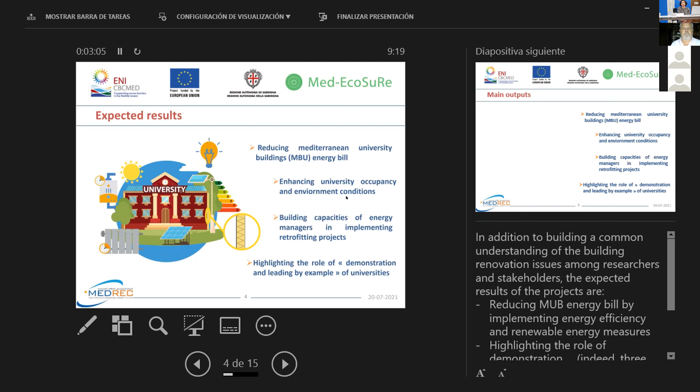In addition to building a common understanding of Mediterranean university building renovation issues, the expected results of the project are: reduced Mediterranean university building energy bills using energy efficiency measures and renewable energy applications; enhancing university occupancy and environment conditions; building capacities of energy managers in implementing retrofitting projects within universities, in particular, and within public buildings in general; and highlighting the role of demonstration and leading by example of universities.

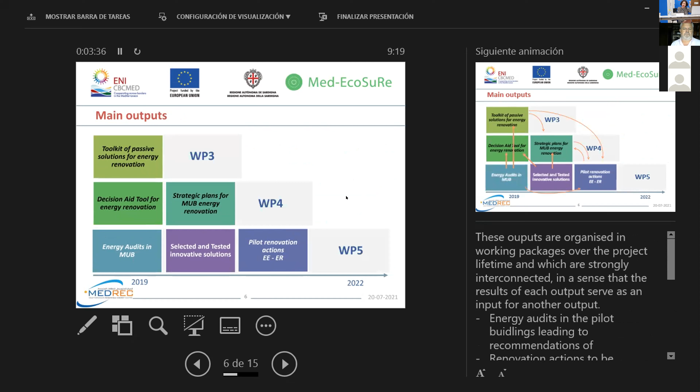So to meet these objectives, the project has identified a set of 6 outputs mainly. These outputs are organized in working packages throughout the project lifetime, and they are strongly interconnected, in the sense that we talk about outputs or realizations, the main realizations of the project, where the results of some outputs serve as inputs in other realizations.

Now, coming to the main achievements of the project so far, we first started by establishing a living lab, which is an intermediation entity for the collaboration between academics, decision makers, and stakeholders, in order to support energy managers on planning and implementing innovative energy measures within university buildings.

So basically, a living lab is a way for university researchers to conduct studies. We have to move to the next slide, sorry.

It's a way for researchers to conduct studies in vivo, based on experimentation and integration of research and innovation in real life situations. The Living Lab is a dynamic space where ideas and solutions are co-created in partnership with key stakeholders in a real world environment.

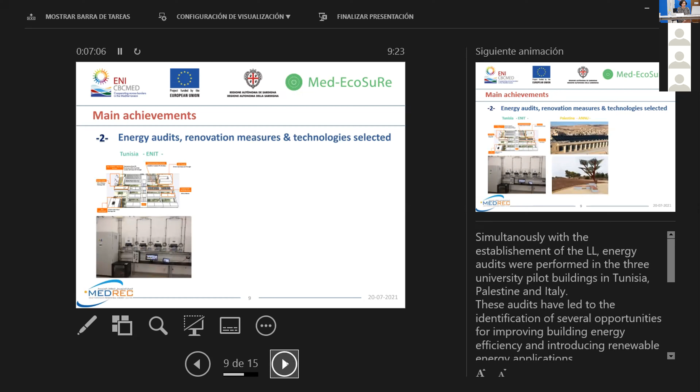Simultaneously with the establishment of the Living Lab, energy audits have been performed in the 3 university pilot sites: in Tunisia, at the National Engineering School of Tunis; in Palestine, at An-Najah National University; and in Italy, at the University of Florence. The audits have led to a set of recommendations and the identification of opportunities for improving the energy performance of university buildings.

Besides, the partners have identified and selected a set of technologies to be implemented in real life, in real environment building universities. The selection process has been supported by companies associated with Solartis.

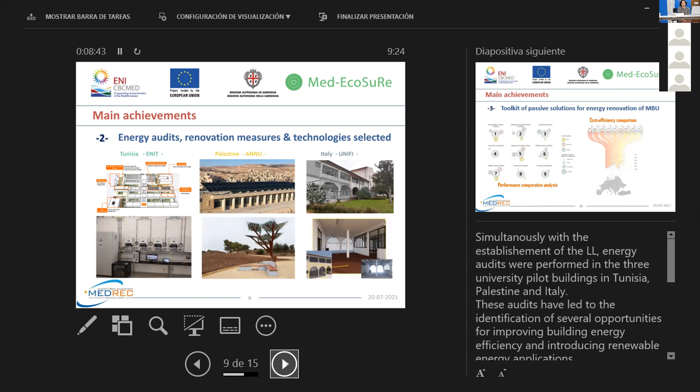One of the tools developed within the project framework is the toolkit of passive solutions designed for energy renovation of Mediterranean university buildings, which is an interactive, bottom-up and participative tool for best practices on energy retrofitting of universities, targeting mainly technicians and energy managers, as well as students as future professionals and decision makers. Professor Antonella will provide more details on this tool.

Another decision support tool is the one developed by the University of Sevilla team. It's a tool that enables energy managers to plan their renovation process within their universities. Professor Molina will later provide more details on this decision aid tool.

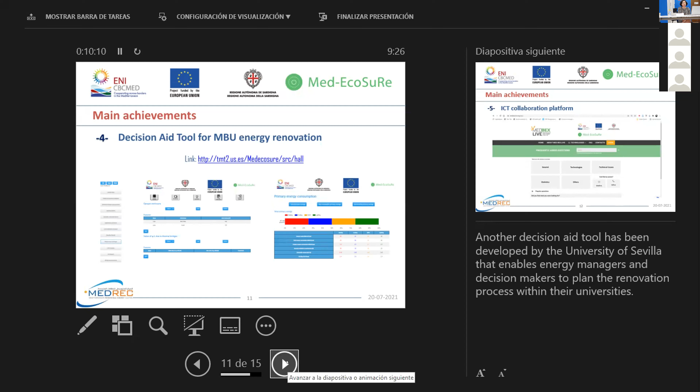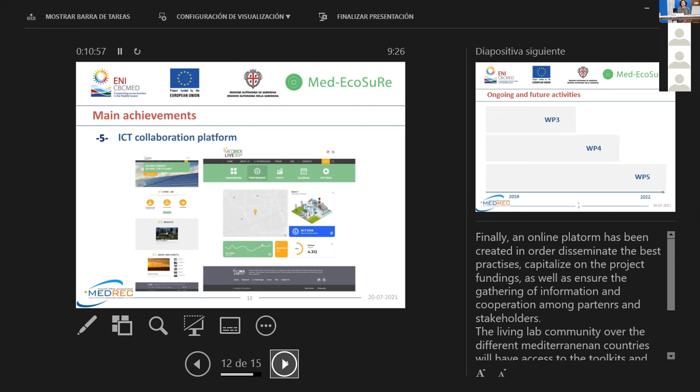And finally, an online platform has been developed in order to disseminate the best practices and capitalize on the project findings, and also to gather information among the partners and in collaboration with the stakeholders. So the Mediterranean stakeholders from different countries will have access to the platform and to the toolkits and different tools that have been and will be developed in the framework of the project, as well as the best practices drawn throughout the renovation process in the pilot sites of Med-EcoSuRe.

As I said previously, we are at the second year of the project lifetime, and so far we have successfully established the Living Lab, developed a set of tools and decision aid tools for energy renovation. We performed the energy audits that led to a set of recommendations on pilot actions to be implemented. We have selected the innovative solutions to be tested, acquired, and then tested in the university pilot sites. During the last year of the project period, we will continue the implementation of the pilot renovation actions, which has already started in the first year of the project.

We are also foreseeing to elaborate a strategic plan for Mediterranean university building energy renovation, so plans to be adapted for each local context, with the overall aim to convince decision makers to adopt the solutions and approaches developed within the project framework.

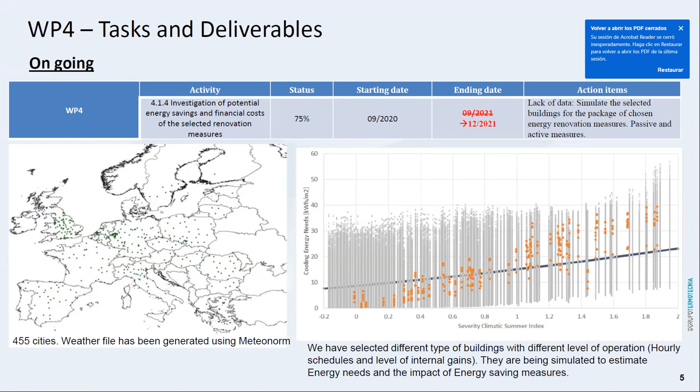This calculation effort is almost three-quarters done and will be finished by the end of the year, as I told you, together with the tool for accessing the results.

The tool will be a simple user interface in which you will be able to select the type of building, the type of climate, the type of energy conservation measure, and see the set of records that have been calculated, just to see the range of energy saving or the range of money saving and so on.

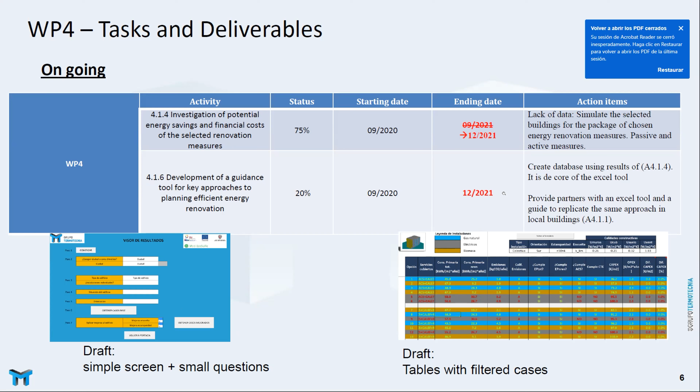The result is more or less an advance. It's not necessarily the final format, but this is taken from an Excel tool now. Everything will be finished more or less by the end of the year, and then the next steps will be a set of training for the stakeholders. Yesterday we were discussing the possibility of making face-to-face training events or webinars, and we have to decide depending on the situation with the pandemic. But we are supposed first to survive, second to be able to travel with this COVID-19 passport or whatever. Well, this is the idea more or less, and now I will start the demo of the tool.

I sent to the coordination on September 15th, 2020, a set of username and password for the partners. Everybody has this username and password, and the server on which the software is running is tmt2.us.es, a server in the university. When you access that, you obtain this web page in which you see the button Med-EcoSuRe. You click the button and you are given access to the simulation engine. Let's finish this, and I will access.

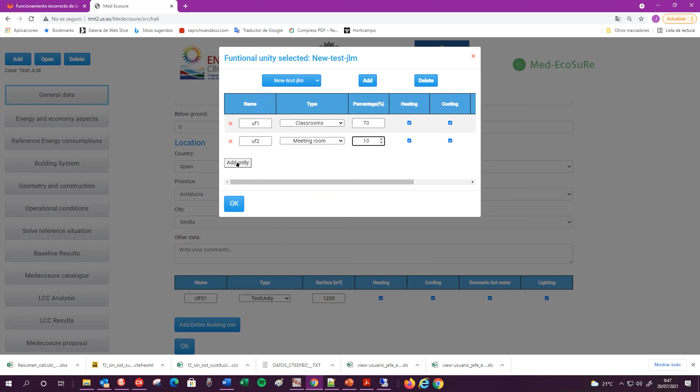When you have finished, you say OK, and going back to the previous screen, you will see the new functional description included in the list. You can select the one you want, and there you have the surface. By the moment, you can only select one user functional definition.

But as you have seen, this is a mixture of different types of activities. It's much simpler for the user to select a single name here, which is divided in different proportions in the building. Well, this is the definition of the general data.

Once you have all introduced, click OK, and the program continuously saves the definition. Then if the connection is broken or whatever, you will not lose your work. Then I will go faster.

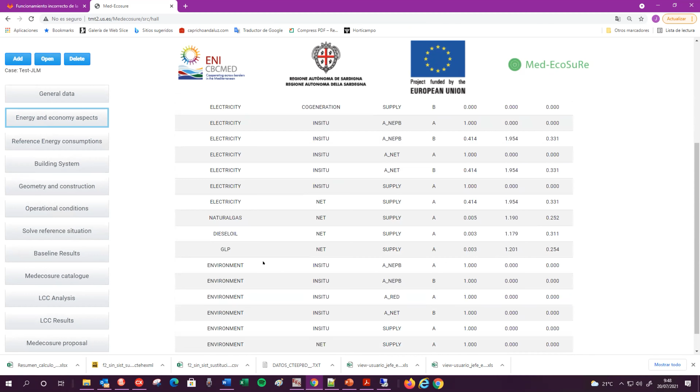The energy and economy aspects is important because you have here a list of energy vectors that can be used in the building, with the pass factors to CO2 emission, primary total energy, primary non-renewable energy, and so on.

And then the economy data, which is defined for the study with the economical study, the typical economic data for the economic study, energy cost, and so on and so on. I suggest that you review all of this and say your opinion in case you miss something.

Well, then the second more important description in the building are the reference energy consumption. Here I have different meters. This is very important. The user has to study the building because they have to introduce the different meters.

For instance, this counter of gas is defined for the energy source natural gas, and the list is the typical energy vectors which is used for heating. And then you have to introduce for the different years that you have been studying in the audit, in the previous existence of the building, you have to introduce the energy consumption.

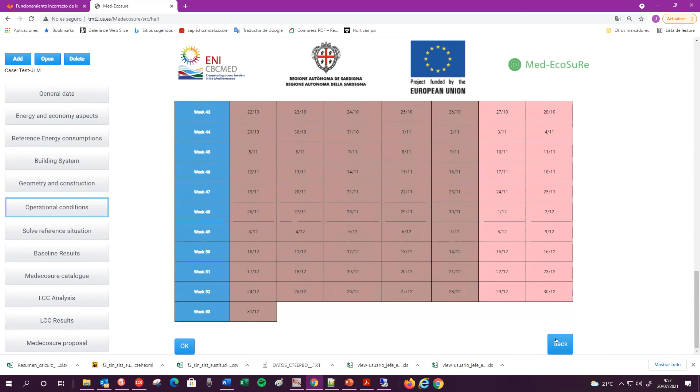Once you have defined all the building in such a way, you go to the reference situation. You see, file generated successfully. This is very interesting because there is another machine in which we have the calculation. Look, this is 9:57. Okay, this is just created, and the calculation engine is working for calculating that.

As soon as it is calculated, you see it disappears, and you see here the results. The results are like that: the data set, the original data set, and all the results. For instance, let me see this file. It's just for you to see, and here are the results for energy needs: heating, cooling, lighting, equipment, and occupancy loads.

Remember this number, which is 105,000 watts, okay, then watt-hours. Then when you go here, you can see the results.

Concerning the raw energy from 1 to the end of the year, for instance, let us see the heating needs. We can see all of them, for instance always this, and say, okay, and you see the hourly values. Just for you to see, you can select a period here. It's difficult, okay. You see this number, 105,000.

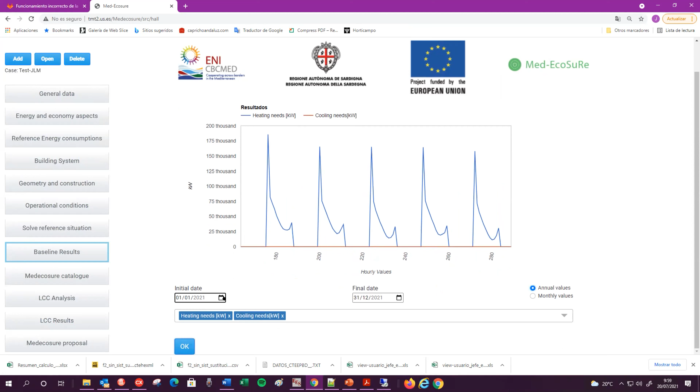Okay, I don't remember how to go back to this representation. You see heating and cooling, and you can mix more data. Well, these are the results in the baseline.

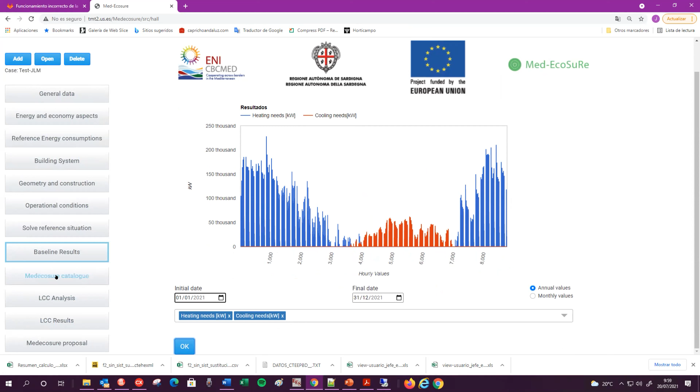Then we have the catalog. Then we can select, but this is very coincident with the Unify work, so it's more or less the same.

Just for you to see the definition of the conservation measure concerning the opaque enclosure. You can select a name for the type of intervention, and then select the component you are going to change. For instance, here I prepare a change in the roof insulation, which would change the initial value of the U transmittance from 0.5 to 0.3, and so on for the rest. You can mix a lot of changes. You can deal with the thermal bridges and so on.

Once you have defined all of these elements, also for windows, the ventilation and infiltration...

Sorry to interrupt you. I think the presentation should be finishing now. We need to present the other toolkit and continue the agenda. No problem, sorry to interrupt you. It's just five minutes more, but I will not continue. Well, thank you very much.

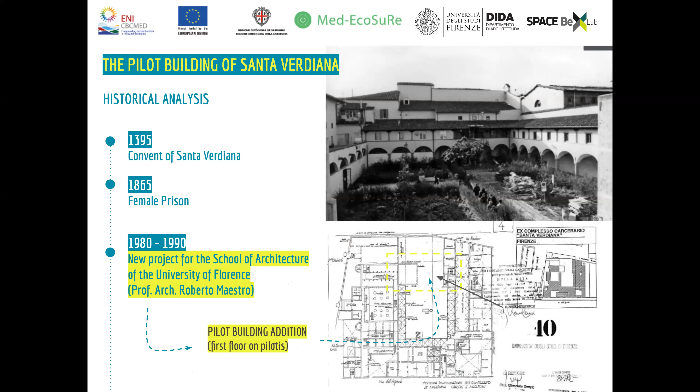So we analyze our building starting from the history. As you know, it was a prison, a convent. So the different functionality changed many times the layout of the building. It's characterized by two different courtyards, and our pilot is concentrated in this part. It is like a bridge from two different parts of the building, separating two different courtyards with a very good exposition. One facade is totally to the north and the other one is totally exposed to the south.

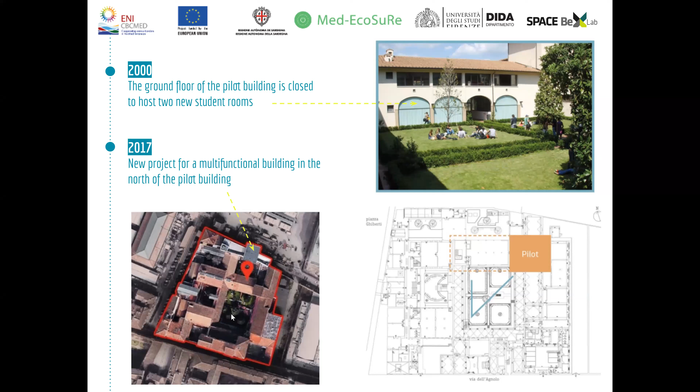Now this wing of the building will become the new entrance of the university space. So it is a very strategic location in order to create a place where it's possible for students, for teachers, and I hope for the citizens to test and experiment a real pilot building where it's possible to see and to have knowledge about the strategies, the technologies. So in order to become itself a training space and a research space, following the real aim of the Living Lab.

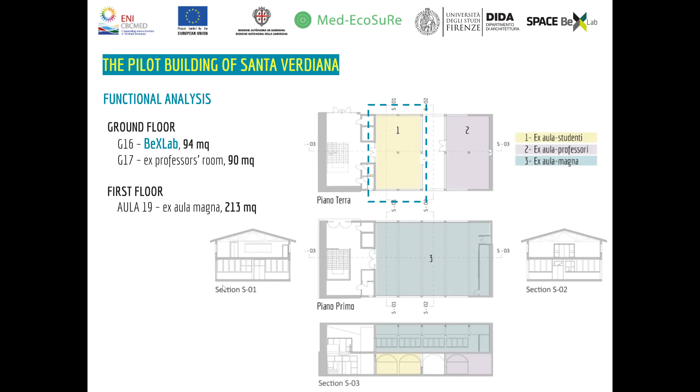Now we closed the first phase. It was the geometrical analysis. It was the creation of a monitoring lab. So we set and we define a protocol, a monitoring protocol, and we organized this space with many instruments and tools to have a complete monitoring of the data about light, about thermal flow, about the occupancy, so to have a very complete framework of the real condition of the space.

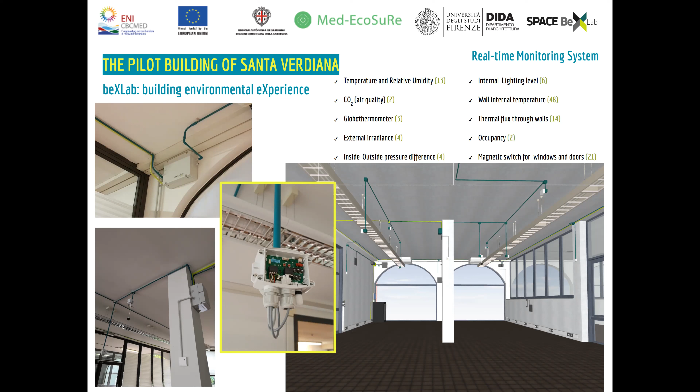In parallel, we develop a digital twin of the space, in order to compare the real monitoring process with the simulation that we can do in a tool.

We are developing the digital twin, implementing it with all the data. Not only the geometrical data, but also the BIM environmental data. So it's possible to enrich the model with all the data.

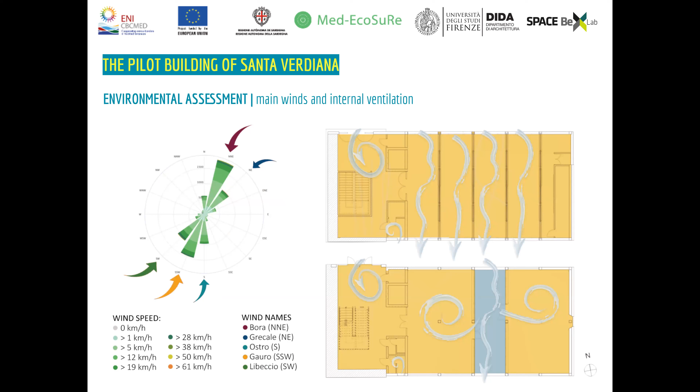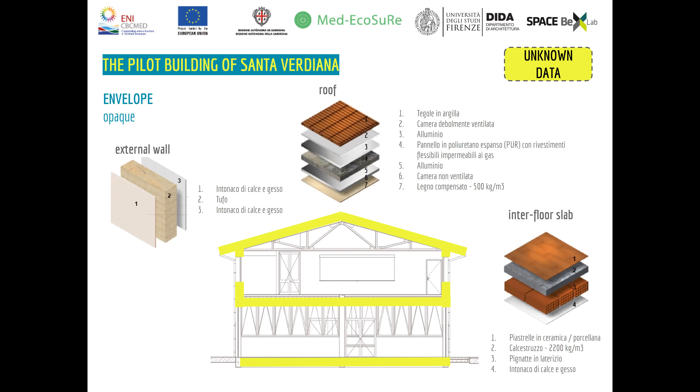Especially about the performance of the envelope and the roof, we are introducing many details about the performance of the wall. This is useful in the second phase where we compare different strategies, materials, and technological solutions to be simulated. So it's the baseline where it's possible to analyze the opaque wall, the window, the fitting, the plant system, the artificial lighting - all the elements that characterize the environmental space and quality, especially indoor comfort.

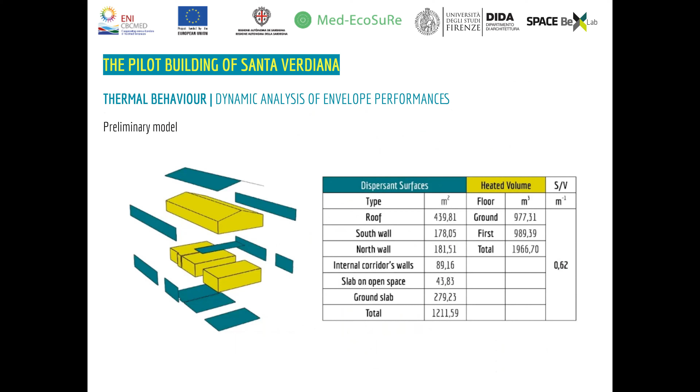Our current work is analyzing in a very deep way all the performance of the element - another research about technical data to enrich the pilot, to enrich the digital twin of the pilot.

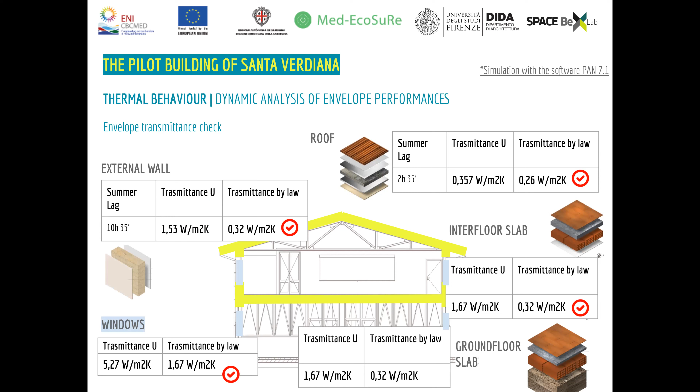We are simulating the real conditions, especially the light factor, in order to test the distribution of light inside and analyze where space is more comfortable than other spaces, especially during the day. So it's not a one-shot simulation, but a dynamic simulation to create a virtual condition of the real space during the whole day, analyzing all the data.

We analyze a portion of time - daily, weekly, or monthly. Many inputs about solar radiation, so the interaction between the external input of solar radiation, the energy, and the temperature inside.

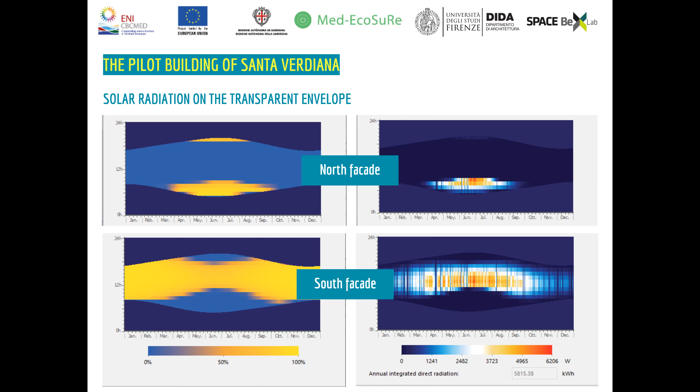We are starting to check and evaluate different apps and software, and we are very pleased to test the toolkit of Professor Molinas as well, in order to compare and analyze which are the main elements and the weight of the different elements in the energy consumption.

We want to push in this direction, to analyze the energy behavior, the different inputs, the different characteristics, in order to check where it's possible to solve the problem in the best way - analyzing the lower aspects in order to create a solution very targeted to our building.

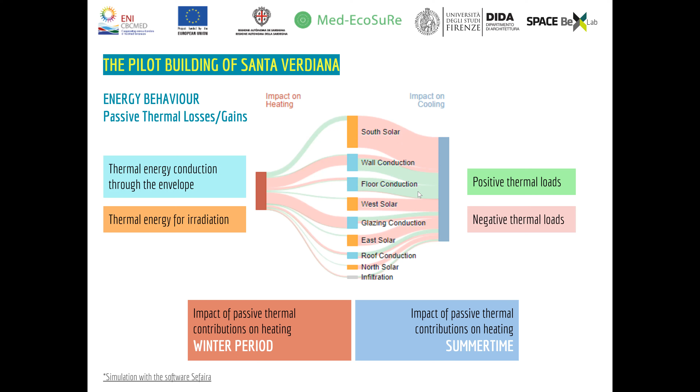We are analyzing the envelope, the thermal energy conduction throughout the envelope, and the thermal energy for irradiation, analyzing which component impacts cooling and which impacts heating, for both the winter period and summertime, comparing with the monitoring data.

The second step is the investigation of different solutions, creating scenarios in order to solve this aspect, implementing a very balanced process. Our aim is to create a real sustainable balance between technology integration, cost, and performance.

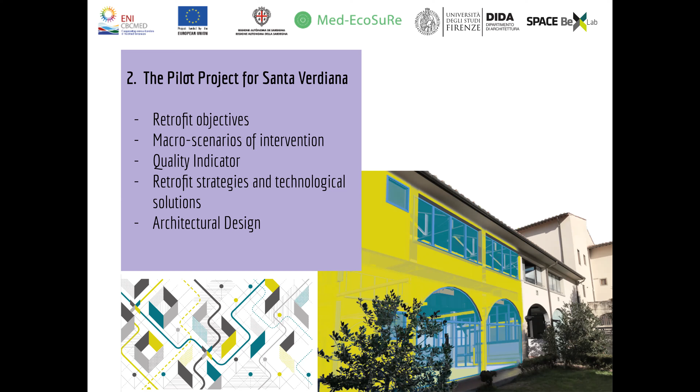We are working on a very strategic building, especially regarding the architectural aspect, so it's not possible to change the envelope or recreate a different architectural aspect of the building. But as a pilot project, we are proposing to our administration different methodologies, especially methodology to obtain a very effective retrofitting solution.

This is the roadmap that we have shared with our administration, starting with the vision of an X-Lab-like experimentation site - a pilot research space for students, teachers, and PhD candidates. Our aim is to implement indoor environmental quality and propose energy efficiency.

But with great attention to the integration in the historical context. This is very important because many university buildings are inside historical buildings in the city center, not only in Florence, but in Italy, and I think around Europe. So this is a key question - how is it possible to mix new technology with the historical context.

Our objective for the pilot project rests on three main pillars: comfort, energy efficiency, and architectural constraint, and we selected different quality indicators. To improve indoor comfort, we are focused on implementing thermal benefits - both the passive and active aspects - as well as natural lighting improvement.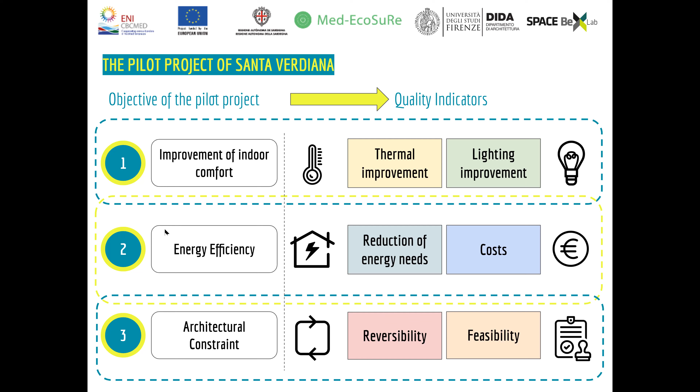We are creating three macro scenarios of the intervention. One is totally represented by the retrofitting of the envelope, so direct intervention on the envelope elements, both opaque and transparent components, by addition or by changing the actual technological solution.

The other scenario we named double skin, creating, especially on the south facade, which is the more problematic aspect, an additional technology to integrate the solar control system, like a shading device, in order to manage the solar radiation in summer as well as in winter, implementing both the passive heat gain in winter and reducing the thermal storage, implementing passive cooling in summer.

The third one is the three-dimensional scenario, creating an external structure in order to preserve the existing situation, especially from the point of view of static and structural aspects. It is an independent solution, but the benefit will be obtained in our building, working in combination with benefits starting from another structure outside the building, working in the very near microclimate condition of the building.

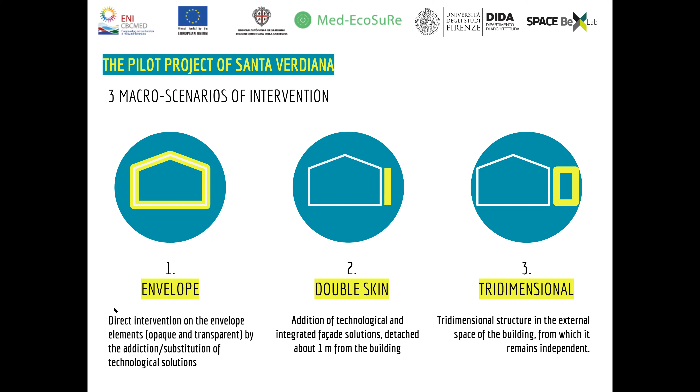Of course we have to manage and balance two different targets: one is to reach a high energy efficiency level, and the other is to reach better integration in the historical context. So we are now exploring the break-even point of this double target to be reached.

In the first macro scenario about the envelope, we are investigating especially three main technologies: thermal insulation of the opaque wall, with emphasis on external insulation or maybe internal—we are evaluating both solutions—fixture substitution, especially smart windows or double glazing, and more high-technological solutions to reduce thermal gain, especially solar radiation control, to manage in different seasons the heat gain coming from solar energy.

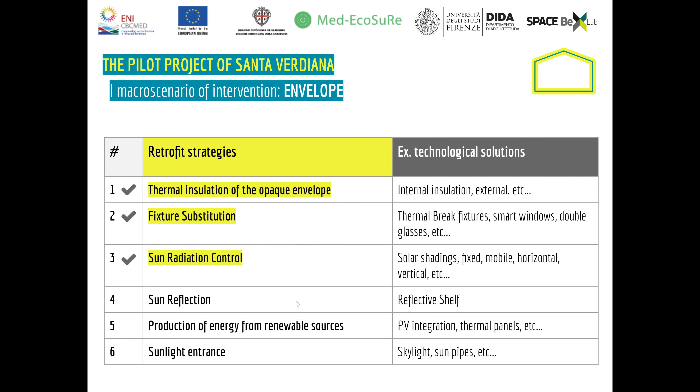We are analyzing the different benefits starting from this kind of solution, comparing the energy reduction but also the feasibility of the structure and the different benefits, especially in implementing wall conduction, since we are working more on the opaque wall and envelope performance.

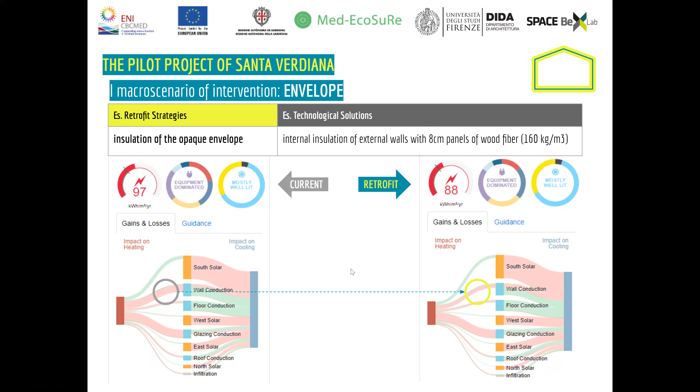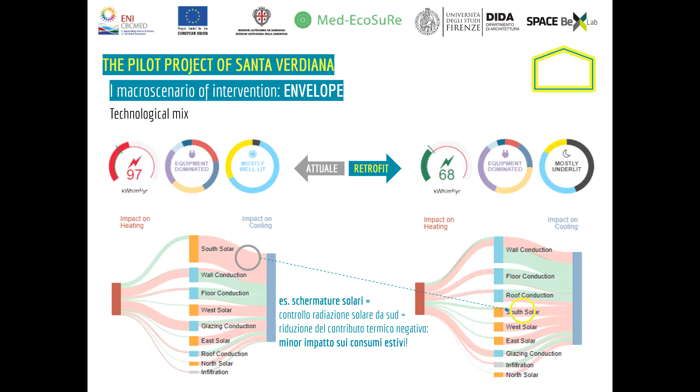We are analyzing the benefits from each technology, trying to determine in percentage how much energy it's possible to reduce with the technological mix in the envelope. So many scenarios, many analyses—let me go faster to show you the architectural solutions.

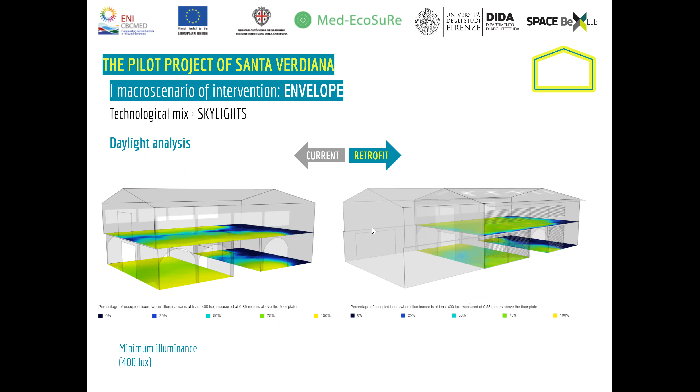The first project is about the skylight. We are investigating the opportunity to create a skylight in the roof, not only to manage the daylighting inside and have a homogeneous distribution of natural daylighting, but also to integrate the fitting within the plan inside the roof. So we are working both with simulation, analysis on the real site, and the digital twin, comparing different mixes.

Many scenarios, many architectural solutions to analyze the concept. For the double skin, we start from a very easy solution: a simple structure outside the building to provide shading, introducing a shading device, and maybe implementing this with photovoltaics, such as double-glass photovoltaic panels, to have both solar control and energy production through the solar radiation, investigating different architectural solutions.

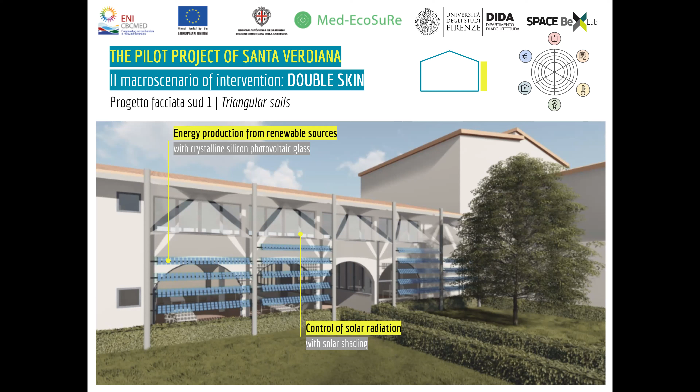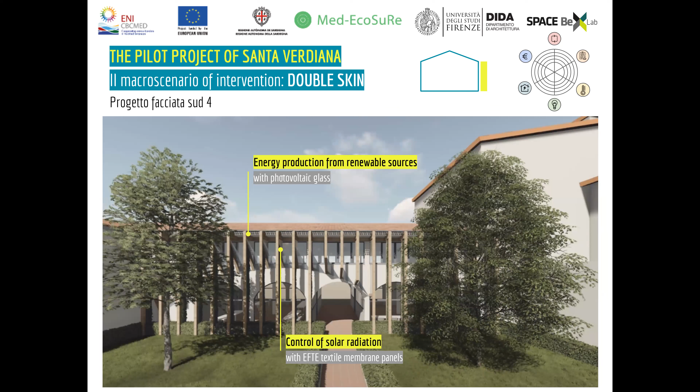We replicate the idea of the portico, replicating the distribution typology of Florence buildings in the new structure. So many architectural concepts with different materials and different feasibility levels, investigating the mix of material performance—the use of steel, the use of wood—and how each material could contribute to a similar architectural scenario, implementing comfort inside.

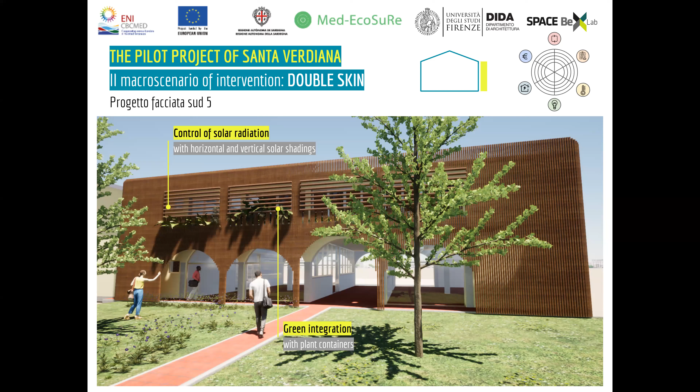Based on the similar architectural layout, we change the performance of material, the color of material, the capacity to transmit heat, and of course the way it replaces daylight inside.

Many simulations. Another point is the opportunity to investigate a green integration, especially with plant containers, using plants as a new natural-based technology to implement comfort inside. So the idea is to create a new facade, like an external extension of this research laboratory, experimenting with different sections and technologies to monitor and test different solutions.

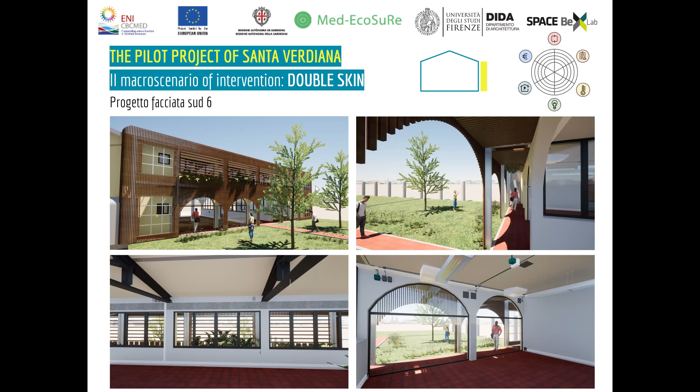Another one, more attractive and more design-focused, centers on the horizontal shading device, analyzing the effect of lighting, especially on the first floor, because it's very dark—analyzing the reflection, the tilt of the solar radiation, and the reflection inside.

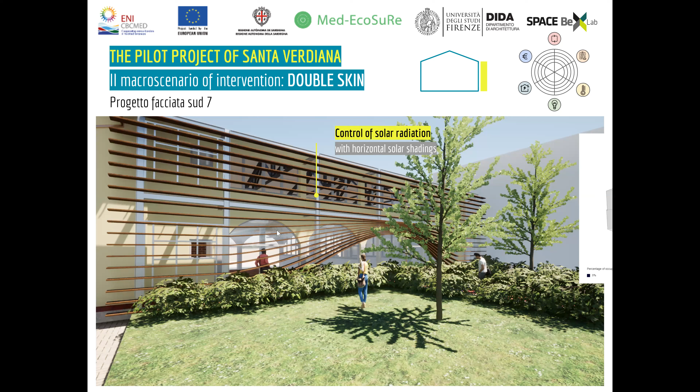So as you can see, we work both with external view and the internal simulation of the internal space to control everything. The last one is a 3D, creating a new external space, maybe useful for students to spend their time outside the building, because there is another need to extend this space outside. Combining both the integration of energy production, the integration of greenery inside, and

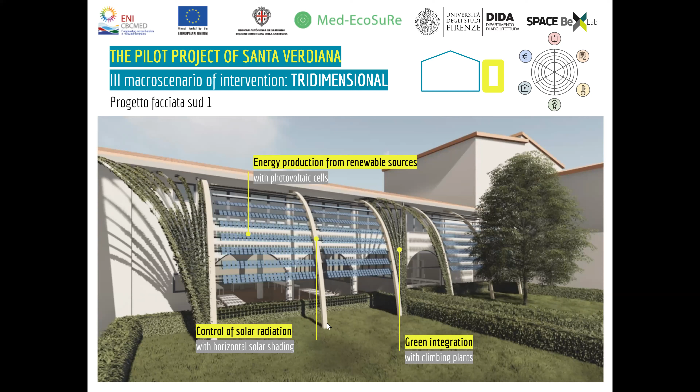a structure combining the architectural aspect of the old portico. Different versions of this idea of external structure, experimenting with different materials, different solutions. Some solutions about perforated steel elements, as well as different textures or aluminum or other elements, or maybe combining the green integration with climbing plants.

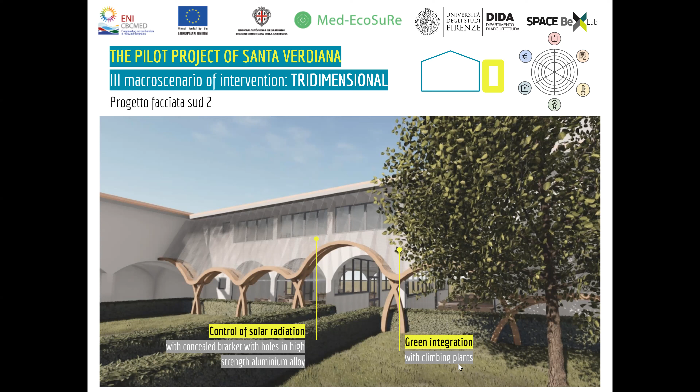So another one is a different concept, an outstanding, self-standing structure outside the building, like a tree, like vegetation outside, to create a microclimate, a new microclimate. This is the last scenario, analyzing how it's possible to solve the problem inside the building by working outside. So it is a borderline solution, but I think it's very useful to investigate this other aspect, especially in existing buildings, especially where it's possible to have a garden outside or more space outside.

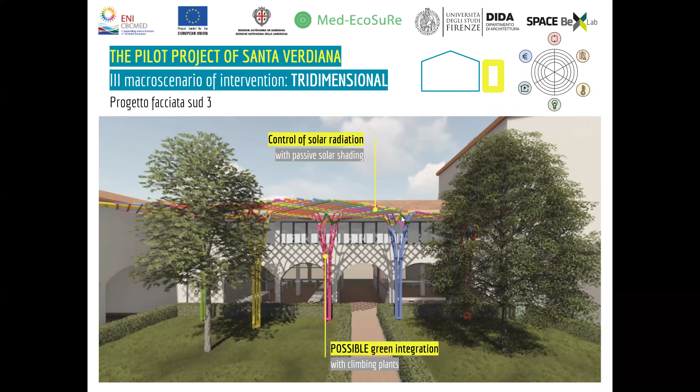So in this structure it's possible as well to integrate not only shading devices for solar radiation, but maybe it's possible to integrate plants as well as PV panels. And this kind of structure we analyzed to develop into another concept, like a 3D structure, maybe integrating much more plants, much more greenery, and transforming the garden into a pergola, implementing the outside space, combining the microclimate.

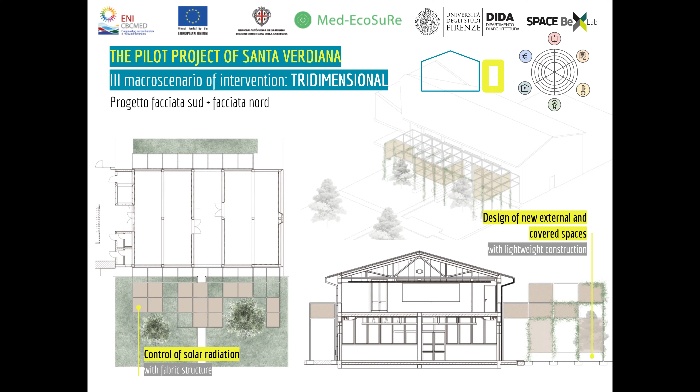Sorry to interrupt you, you should be ending the presentation shortly. Yes, I'm finished, and this is the last slide.

Just to explain, our work is ongoing, it's a process, and now after all the evaluation, we are analyzing and evaluating which is the more suitable solution. So thank you very much.

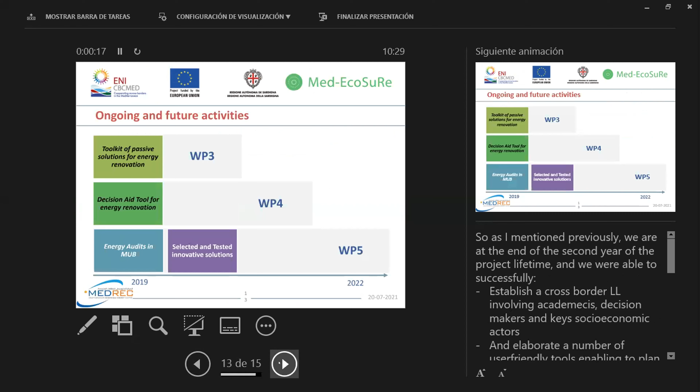Before starting presenting the training program, I would really like to thank all the project partners and stakeholders we have been involving, including the companies present with us today. Thanks to this collaboration, we have been selected as one of the few success cases within not only the ENI CBC MED program, but also within the ENI-CBC, the European Neighborhood Instrument cross-border cooperation. This has been shown through the positive evaluation of our progress and intermediate reports, where we obtained the highest marks, and also by being featured in a thematic publication on environment, published by the ENICBC program as a project targeting climate mitigation and adaptation in the Mediterranean region. So we are really, really proud of this achievement, because we have been working on a very promising, ambitious, and also challenging project.

And when I say challenging, part of it is due to the pandemic, but also because we are dealing with public universities, and in some cases historical universities. We know it is not very easy to deal with this type of university and to plan and implement innovation actions. So yes, it has been very challenging, but thanks to a very highly qualified consortium and stakeholders actively involved in the project, we have come this far. I hope we continue to work with the same enthusiasm in order to reach our final goal, which is to provide decision makers in the Mediterranean with action plans enabling them to plan the energy renovation of their university buildings, which can also be extended to public buildings.

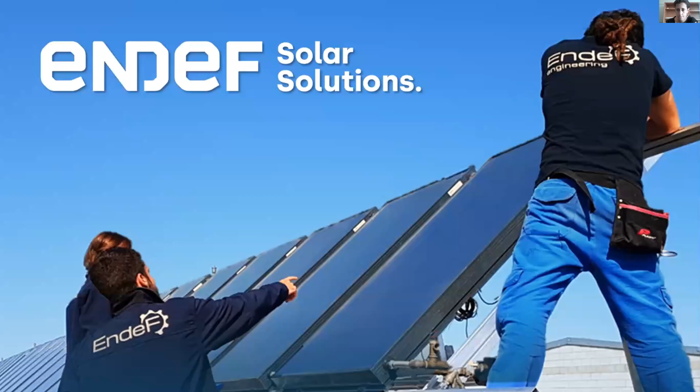Good morning, I'm Isabel, the CEO and co-founder of Endef Solar Solutions. We are a small company located in Zaragoza. We were founded in 2012, and our mission is to make the independence of the people possible thanks to the sun. We are a very small company, but with a high level of innovation. In fact, we have several PhDs in our company, which is not quite common in other small companies. And we work very hard on doing innovation and moving this innovation into the market.

We have 5 different areas: a research area, an engineering area, the manufacturing area, the installation, and the monitoring. So that way, we are working in different areas, and we are able to have information from the field about what is happening, and also continue improving always.

Now I'm going to present the solutions that we have presented in this project. In our world, we have a problem: our buildings and houses have high consumption, and we are not able to produce all the energy that we need with solar or PV panels, because the efficiency is low, or quite good—we can see like 20% efficiency, but it's not high enough to cover all the consumption we have in our buildings. We can see the consumption of our buildings in Europe is quite high. Also, the heating and cooling part is a critical consumption that is difficult to cover with solar energy. For that reason, Endef in 2012 developed hybrid solutions that produce heat and electricity in a single panel, and that way we can reduce the area needed to produce more energy in our houses.

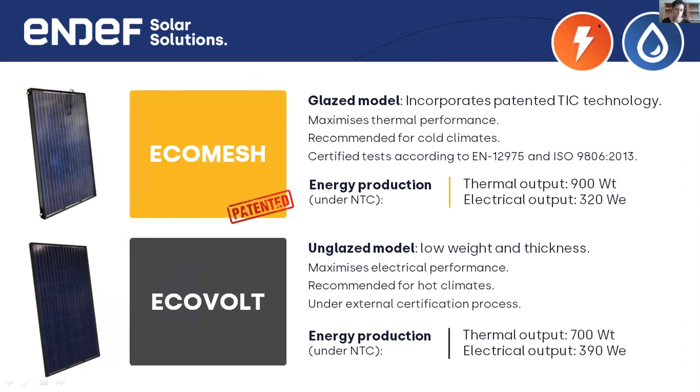So we have 2 models with water. One is patented and another one is not. One is a glazed model that produces more heat and not too much electricity, and another model is an EcoVolt, an unglazed model that produces more electricity and less heat. So depending on the energy that you need, you can use one or the other. And for this project, we have presented a new hybrid solar panel that we are developing, called EcoAir. In this case, we don't use water as fluid, we use air, and we try to produce electricity and heat, but for heating, not for water—that's the main difference.

Here you can see that we take the sun. We can produce around 20% electricity, and the rest, the PV panel is going to liberate as heat. So we try to recover part of this heat with air and use it for heating. And this is our panel. This one is also patented, because we have designed a symmetric absorber that is located in the back part.

And with this panel, we can use it in winter for electricity, space heating, also ventilation and purification of the air, and in summer to cool down the ambient during the night. And also, of course, electricity, ventilation, and purification.

And this is how it works. We put several EcoAir panels together, and we just need a ventilation box where the fan is located. We can introduce the air into the building if we need it, or evacuate it if we don't, for example in summer when we don't need more heat inside.

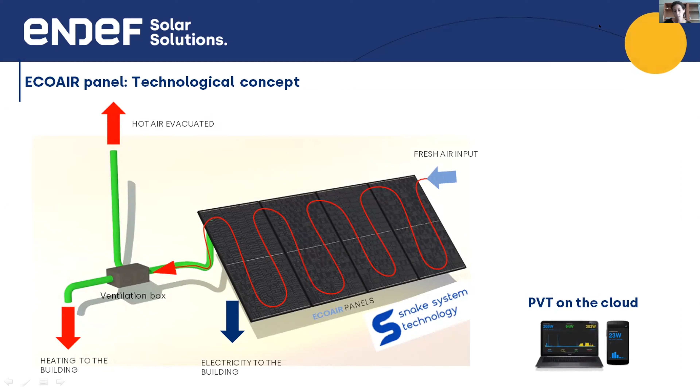We also have this all on the cloud, so you can see how the installation is working, and also change the configuration if you need it. These are the main parameters of our solution.

We can achieve temperatures up to 55 degrees. The thermal power is around 680 watts. And the electrical power is quite good, at 400 watts.

It's the first PVT that is based on half-cell PV module. So we are using air as fluid, but we are also using a PV technology that the PVT market has not used until now.

We also have some advantages if we take into consideration the mounting system. We can install in new and existing buildings, and we can use flat and sloping rooftops. It's very scalable, like PV panels, for large or small installations.

You can see here how it's working, like in winter, as I mentioned, to produce electricity, heat generation, and ventilation. In summer, we can evacuate the air and use it for cooling during the night if we want. So the main advantages of this panel are that we can achieve high temperature with air, which is not very usual.

We can install in new and existing buildings, and the payback is very low. Right now we have one demo with 5 EcoAir panels in offices, and here we can see the first results.

This installation started working in April, so we don't need heating every day. For that reason, on some days we can see the PV generation, that's the red line, and the blue only when we need heating.

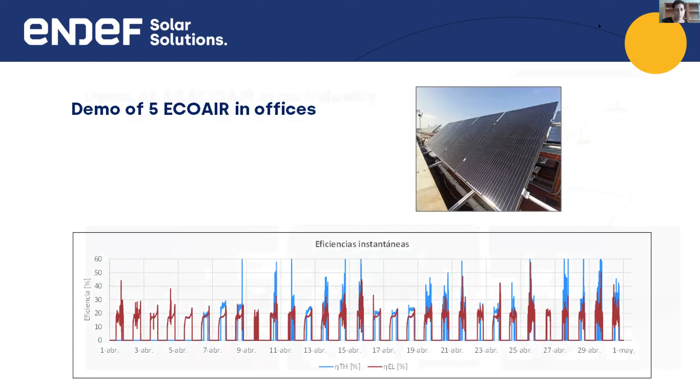And now we are carrying out another demo in an industry with 80 EcoAir panels, which we will use to heat the work space of people who right now don't have a heating system there. So this winter we will see the first results of this installation.

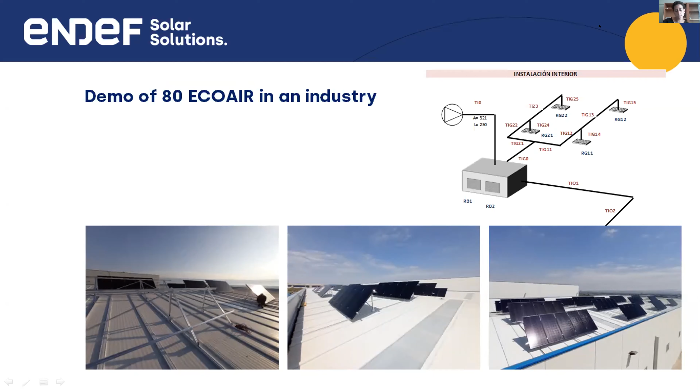And this is everything. If you have any questions, I will be happy to answer.

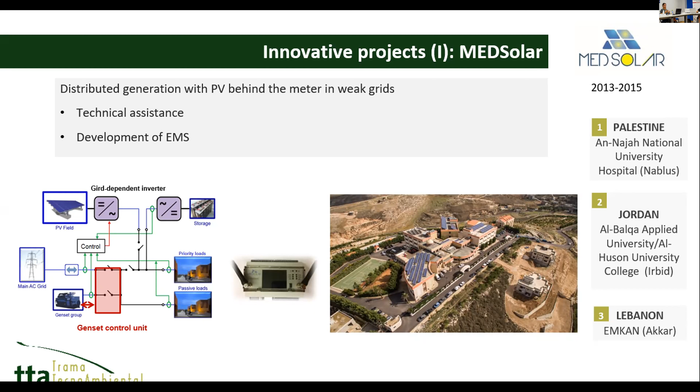So the first pilot was at An-Najah National University Hospital. It comprised a PV plant of 140 kilowatts, which was previously installed with the Med-EcoSuRe project. The actual functionality of this PV plant was to provide peak shaving. So the energy controller was able to provide peak shaving when there was grid, and when there were blackouts, the PV was used for fuel reduction as a fuel-saving means.

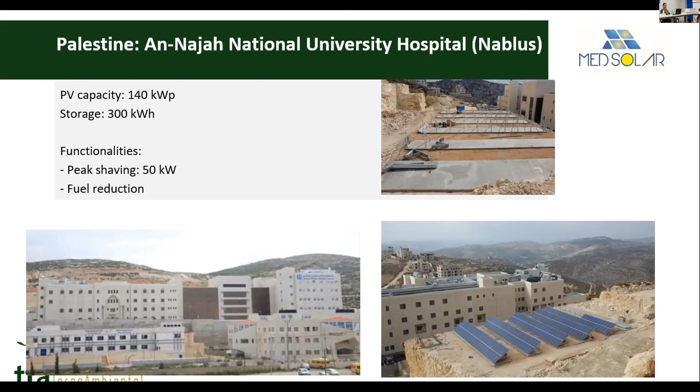Then in Lebanon, we installed PV on a market, the EMKAN market. In this case, the PV was used to electrify, as a UPS, uninterruptible power supply, some critical loads like cold storage, and also do fuel reduction and also net metering, which in Lebanon at that point was permitted when the grid was present.

The third pilot was in Jordan, in another university building. It comprised a plant of 80 kilowatts, and the functionality there was also to do peak shaving when the grid was available, or fuel reduction when the university was run by the diesel gensets. On all those three plants, they also had storage to complement the PV generator.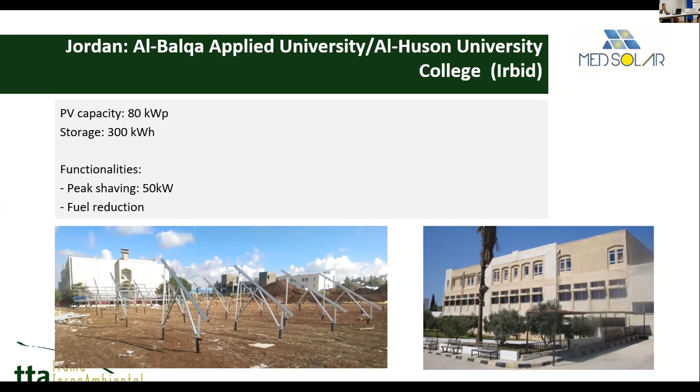So the other innovative project to present, which was actually what was filled in the form by us, is a different concept. This is a PV integrated in an autonomous building. This solution was already proven after being installed in 15 clinics in Ghana, in a project funded by USAID. So that was not to support the grid or do energy efficiency, but actually to electrify the building, a standalone PV plant.

So we designed a kit of a PV array of 3.5 kilowatts on the rooftops of the institutions, of the clinics. They were 100% solar, they didn't have any backup. So the innovation here was actually to share the limited amount of energy among the different users. The clinics actually did not only have the clinic, but also the houses of the staff, of the doctors and the nurses.

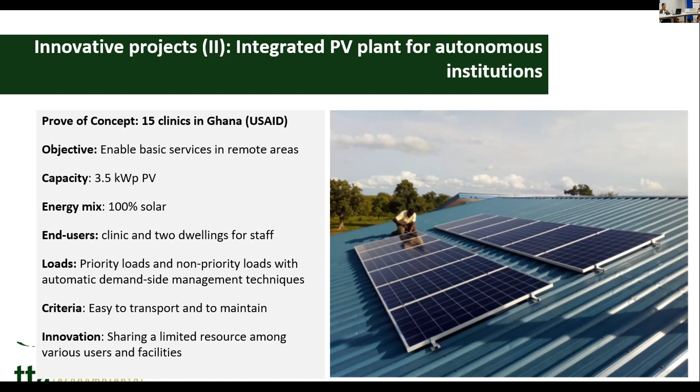So through adding some smart meters, actually advanced meters, we managed to split the energy among the different users equally, according to their actual needs. The most important criteria of this installation, since it was in very remote locations in Ghana, was to be very easy to transport and to maintain. So we ended up with this solution.

But actually required very little or no maintenance. We put non-spillable lead acid batteries, closed and sealed ones, so no maintenance needed for the batteries, just some cleaning of the PV modules. So this kit provides energy of between 8 and 11 kilowatt hours each day, and it has also a storage component of 31 kilowatt hours.

And in terms of operational aspects, sharing energy is possible through those meters you can see in the top picture. This meter is called an electricity dispenser, and each end user had one installed and configured already for the energy limitation, the daily energy limitation.

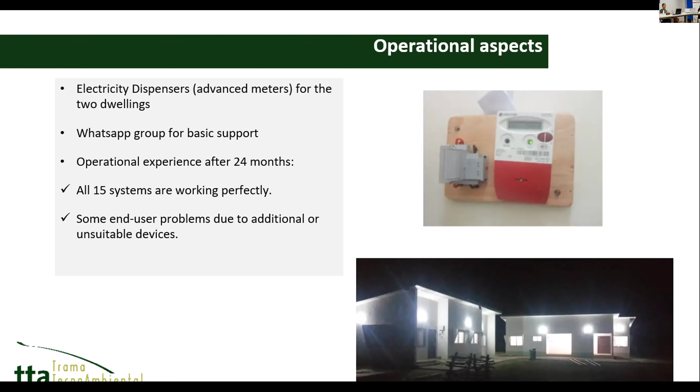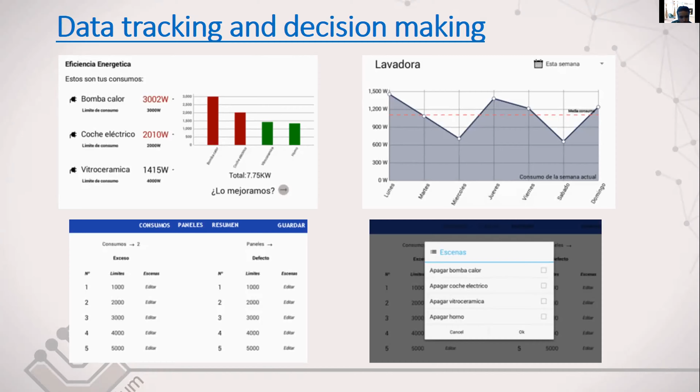Now in the company we are going one step further and starting with the smart city project. These are projects where we take all the knowledge we have from buildings and develop these functions not just for one building, but for the whole city.

We take data from all the buildings and manage the street lights and their consumption. With all this information, we send orders to the different devices installed in the buildings and in the city, saving energy not just in one building, but for the whole city.

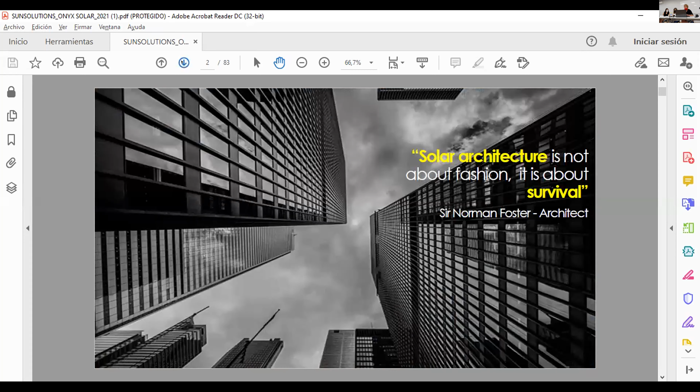With this technology, photovoltaic glass, you can have a solar generator system in your building, and you can switch this special glass to the needs of the building. You can use it in the wall, as a curtain to separate spaces, as a roof, or as a floor.

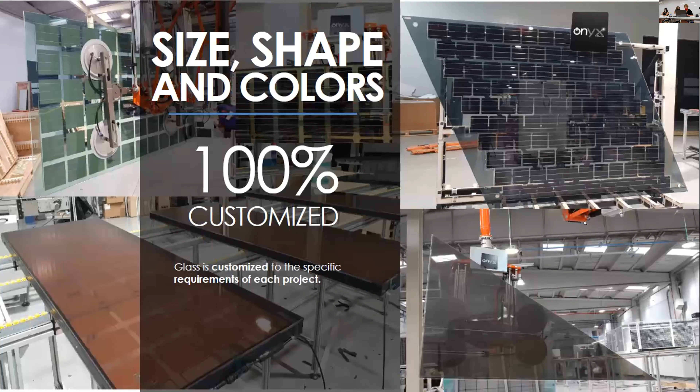You can use it in the way you need in your building, so you only need to study your needs of consumption, or detect what is the focus you want to use this glass for, to produce energy, or to avoid the sun entering in an area, by asking the manufacturer how many cells you want in the square meter you need to protect from the sun. You can design the glass as you want.

This glass has a lot of good properties. One is energy generation - you have a generator of energy in your building. You also have a filter of sun, so you can use it as isolation. In countries like Tunisia or Palestine, where we have a lot of sun every month of the year, having a filter in your wall that also generates energy gives you two things in one material. It's also thermal and acoustic insulation.

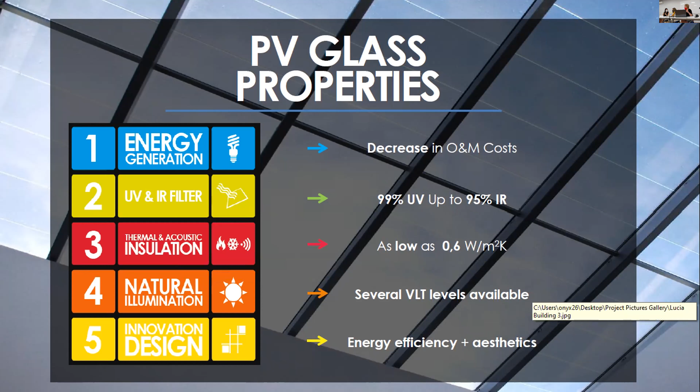You have natural illumination available in the curtains. You can decide the level of shadow you want, and you can also ask for color of cells and percentage of cells in the square meter area. So it's a very flexible and innovating material.

This glass is done with amorphous cells. It's a specific type of photovoltaic cell with an efficiency similar to crystal silicon, comparable to the standard solar panels in the market.

This solution is very aesthetic, as you can see in the pictures. You can suit this material to every type of form, scope, wall, or curtain. We can do very different types of forms.

So, isn't this my presentation? No - ah, yes. So, as you can see, you can use it exactly as you need, according to demand.

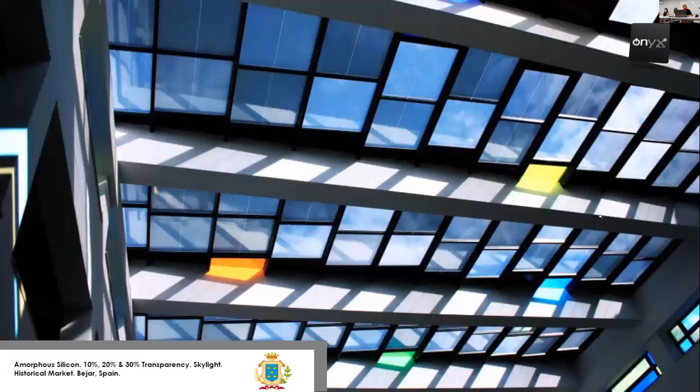In these pictures, you can see the roofs and envelopes, and here you can see the cells. We can tell the manufacturer to put more or less cells in the glass to produce more or less shadow as needed. This is very interesting, and very beautiful, very aesthetic.

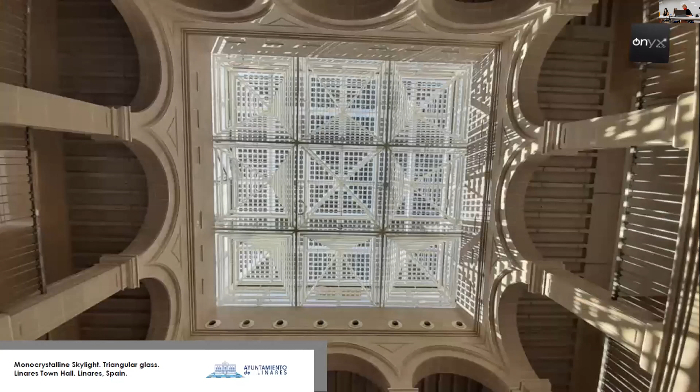So I invite you to ask us for the form you need or the space you want to cover, because you will have a very good solar system generation. We can do both solutions with this solar energy: sell electricity to the grid, or make an isolated self-consumption system for the building. It's quite flexible. You see the very good effect with the sunlight, and you have in the same system a lot of properties: energy generator, aesthetic glass, and isolation system.

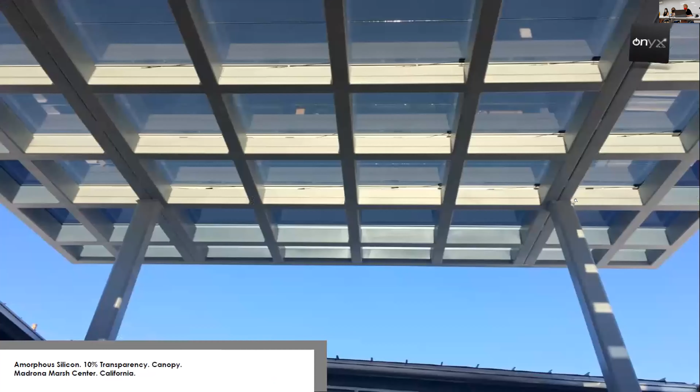So I invite you to ask me for more information. At the moment, that is all. Thank you very much for hearing me.

Thank you, Maria, thank you very much for the presentation. I think it's very, very interesting, and you can shape everything the way that we want it to be. It's good. So, thank you for your presentation.

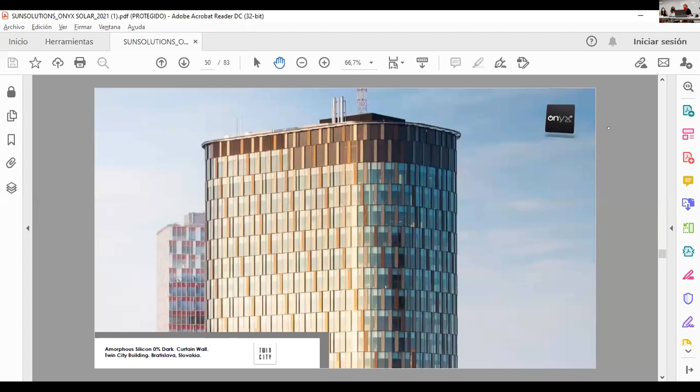Sorry, I forgot one thing. It's very interesting for the buildings, for the universities.

You're not sharing now? Yeah, I need to share this. Sorry, because it's the latest news I have, only from this week. Am I sharing or not? No, you're not sharing.

It's only 2 minutes. Yeah, it's okay. We still have time.

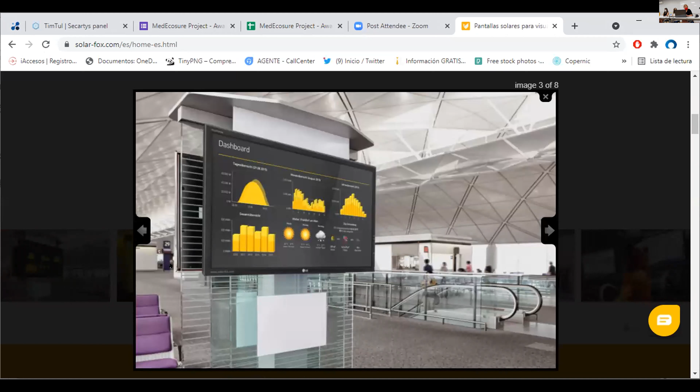Solar Fox. Also for public buildings, schools, universities, or administration buildings, when we have done the installation, we can set this big screen, connected with the monitoring of the system. So in this way, the university can set this screen at the main door, and you can show all the people entering the university the real production of the system.

And this screen you can set with specific data you can show. We can design the data you can show, especially - if you want to show more of the saving energy in the battery, or only the production. We can decide exactly what data you can show, and we can implement this big screen for publicity of the project, for example.

So it's very interesting - it's the last news I have, sorry I forgot. Solar Fox screen data showing is the name. So it is another item I want to explain. Thank you for the last news. I think this is very interesting as well, if you want to show to the people in the universities some certain information.